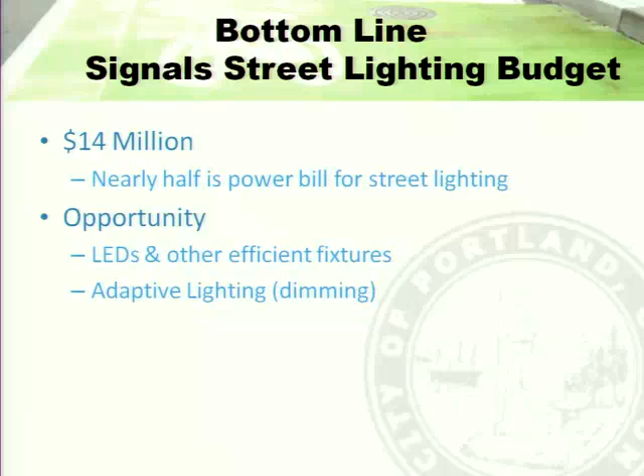Right now you turn on the street light and it's the same brightness from day one. We use the same power, and the reality is we should be doing better than that, right? At 3 in the morning, does it need to be as bright as it is at 8 p.m.? That's something we're working towards, but we haven't done it yet - we haven't gone to the effort of installing dimmers like you have in your household. But back to transportation, my true passion is in signals.

This is a good example of where transportation hierarchy exists. The Climate Action Plan has this graphic, so I borrowed it from that - you've probably seen this in many different places if you've followed policy and planning. Pedestrians are at the top of the triangle, so we should prioritize pedestrians because everybody's a pedestrian at some point in their trip. Then bicycles - the most efficient form of transportation. Public transit next, then commercial vehicles, high occupancy vehicles, and finally single occupancy vehicles. This is an intersection in downtown Portland where I'd suggest we've gotten it right: pedestrians have sidewalks - not the widest, but they're sidewalks, and this one's actually pretty good - and for bicycles, we've put in a buffered bike lane.

You heard about that last week and how effective that has been. We could do better, but we at least have allocated the space. Public transit, light rail intersecting the street, that's not bad. It's not a subway system, but pretty good. Commercial vehicles, we have parking here. High occupancy vehicles, we'll throw that in with transit. And then finally, single occupancy vehicles, we have one lane for single occupancy vehicles.

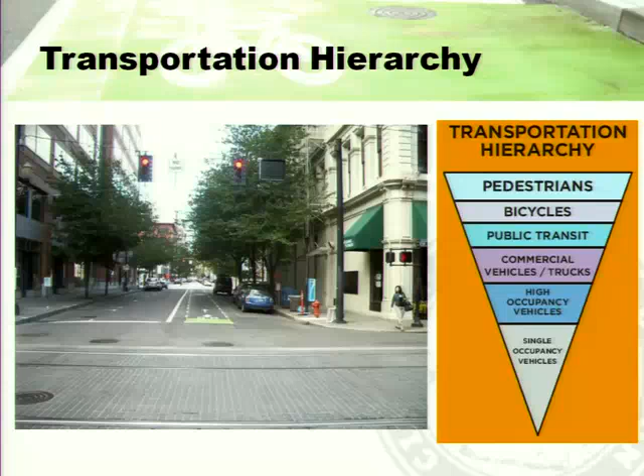So this picture is the embodiment of that pyramid. Now, have we done that everywhere? No, but is this a good example of where we're going to go? I think so, I'd suggest it is.

If you look ahead to 2030, huge increases in bikes. We want three times as many bikes, we want to halve the drivers, and we want to increase transit. So that's the direction we're going. How do we get there? How do the traffic signals, how do the intersections that we have change to meet those goals? Because those are laudable goals, those are huge changes, and we've got to think about that in terms of the overall urban context.

The Climate Action Plan was not very specific related to traffic signals. I don't know why, not everybody thinks about traffic signals like I do. But the closest goal was urban form and mobility, so that's where I put my eggs in that basket in transportation, thinking about creating vibrant 20-minute neighborhoods. How do we do that? Reducing VMT, improving efficiency of freight movement, and other non-transportation operations objectives. So all those various elements, I want to talk about this first one.

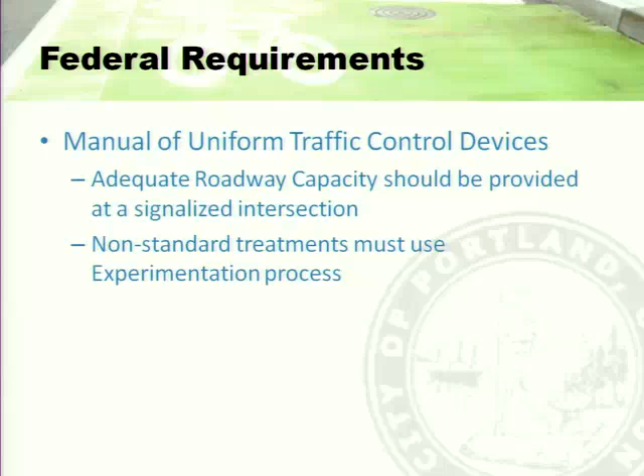So we have these obstacles though that are in our way, and federal requirements. The Manual of Uniform Traffic Control Devices is the document I refer to most as our favorite document. One of my favorite lines from that document is that adequate roadway capacity should be provided at a signalized intersection. What does that mean? Well, it means we should never have failure, right? And if you read the Highway Capacity Manual as well, it's focusing on the needs of automobiles as opposed to all users. Non-standard treatments not in the Manual of Uniform Traffic Control require you to go through this experimentation process where it's closely scrutinized. And that's really a question of how easy is it to innovate? How easy can we just go and look to try new solutions?

My case in point is the city and FHWA. We have pedestrian crossing signals, we have had half signals for a long time. We look at the Guide for Design of Ped Bike Facilities, that's one document we can go to look at what we should be doing. And then there's also, of course, the manual itself. So thinking about how we focus on improving crossing opportunities for pedestrians is very important to us if we're trying to create that 20-minute neighborhood, so that people can walk to go get a gallon of milk as opposed to burning a gallon of fuel to go get a gallon of milk.

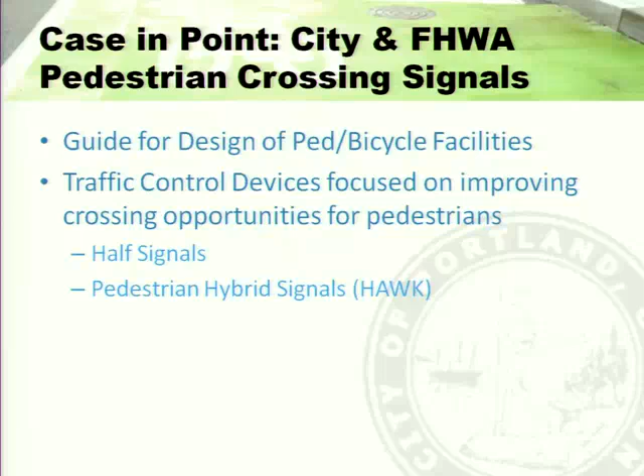And the half signals and the pedestrian hybrid signals, those are two examples that I'll talk to and what we have out there. Here's one of my heroes, Ray LaHood.

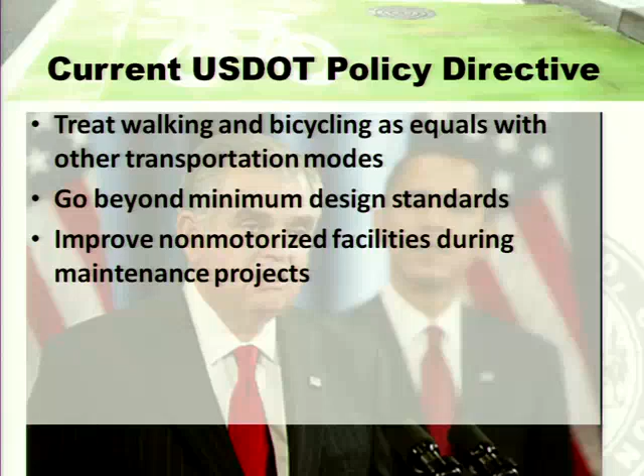Great policy directives come down, but the challenge is those policy directives—here's what he said: treat walking and bicycling as equals with other transportation modes, go beyond minimum design standards, and improve non-motorized facilities during maintenance projects. Those three things are right from Ray LaHood, but the challenge is they're not in the manual. The policies lead the documentation, and that's further exacerbated by views of the staff and the history and our experience.

But what is a half signal? FHWA has determined it's unsafe. If you're a motorist on that side street, you don't have any indication of what the main street is doing. So these have been outlawed for 30 years and they should be removed. But we want to create that 20-minute neighborhood—we want people to cross the street. So removing it, obviously there's an expense, but is it going to be safer is the question.

So we've wondered, what is that research based on? Why remove the intersection that's there today? And how does the federal government provide us with flexibility to meet those local policies? What are the safety benefits for future mode split targets? All those questions come from that top-down approach of 'you need to remove it because it's unsafe.' Well, that hasn't been our experience. So how do we relate our experience to that federal policy and think about the cost benefits of doing something like that?

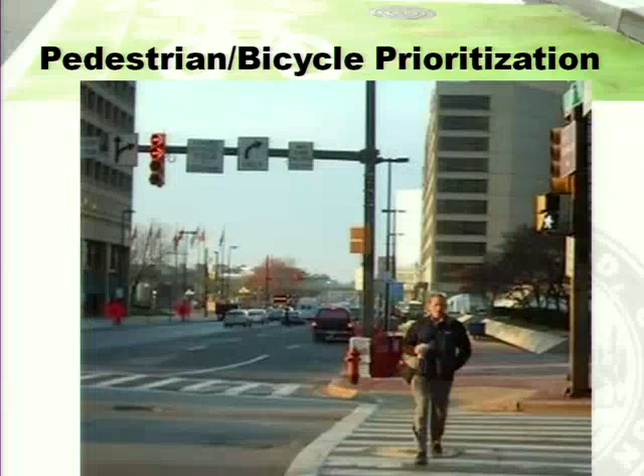And then pedestrian bicycle prioritization. Here's an example—this is actually downtown Baltimore, sorry, it's an older picture—where we've restricted this right turn and we have this walk indication up, giving pedestrians an opportunity. If you've ever walked in Baltimore, Eric probably can speak to this, you may not have the same experience you have in downtown Portland.

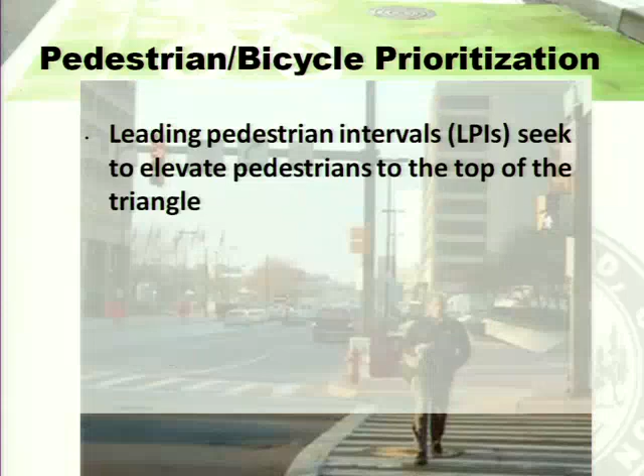So we want to do lead pedestrian intervals to elevate the pedestrian and give them a safer crossing. But there's a lot of research questions in this. Where do we apply these? And what are the safety benefits? These are documentation elements that we've applied.

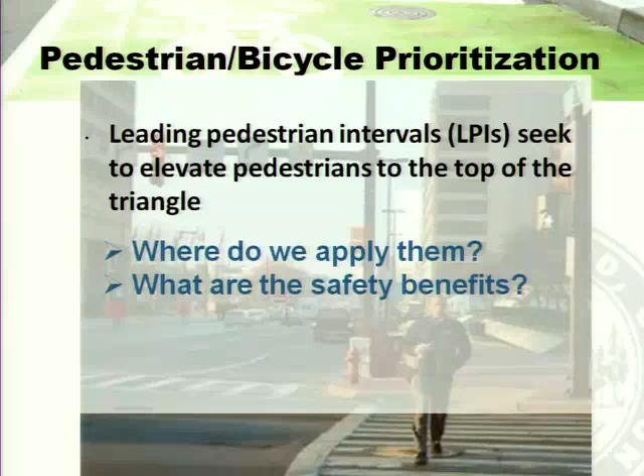We have 10 in Portland, but we haven't gone back and looked at what those elements are. So we have the idea, we've applied it. Now the missing link is where you all come in. Portland State, we need the research to support where do we do these in the future. Do we do them everywhere? Does that meet the goals and the policies that have been set forth? And again, what are the benefits of doing so?

Another one, passive pedestrian detection. This is in a very early stage, and again one of those things I inherited as I came into the role. The thinking is, well, vehicles aren't forced to push a button, why should pedestrians be? So if you think about the pedestrian at the intersection, we can detect them just like we detect cars, if we have a sensor that's looking down at the pedestrian. So a new innovative thing to do is maybe extend the green. If you have a pedestrian walking a little bit slower, perhaps extend the green so you don't bring up a conflicting movement that could cause a pedestrian crash.

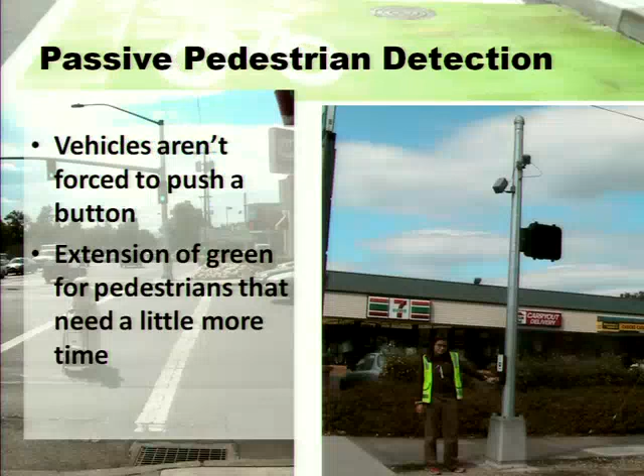And obviously you've probably seen the statistics from last year on pedestrian fatalities. We have a lot of room for improvement throughout the state, so we're doing some of that work now. And again, early on in the stages, the question becomes where do we apply these and what's the safety benefit?

Okay, downtown signal timing is something everybody in the room has experienced, and a fun little documentation piece. There's an adage in planning: are one-way streets inherently good or bad? How many think good? How many think bad? Oh, I think good. It depends, right?

It depends, it's not that easy. The answer, I think, downtown Portland's a good example of this—they're good, they can be really good. What we've done in downtown Portland is we have a one-way regular grid street system with signal cycle lengths that are very short. And why is that good? Well, it means that the pedestrian indications are always coming up.

And then we have this element of quarter cycle offsets where you progress down, but at a speed that's comfortable for vehicles and bikes, as long as the vehicles figure it out. So 12 to 16 miles an hour is our progression speed in downtown Portland, and we have a reverse progression of about 4 miles an hour for pedestrians.

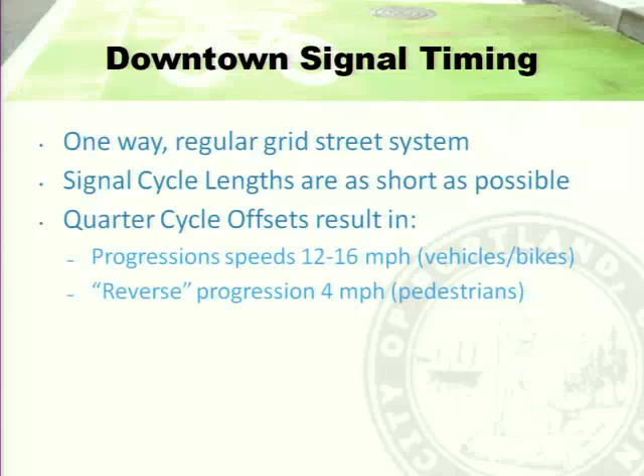So how do we do that? Well, we set it up so one direction of travel—here's your vehicle, it's one way. You can walk both ways, but vehicle travel is one-way going up the screen. So you leave here, you get there. If you travel at 13 miles an hour in the PM peak hour, you're golden, you will never stop. I freak my wife out when I'm driving downtown Portland—she's like, 'you have to stop, you have to stop,' and I was like, 'no, I don't, I know the speed.'

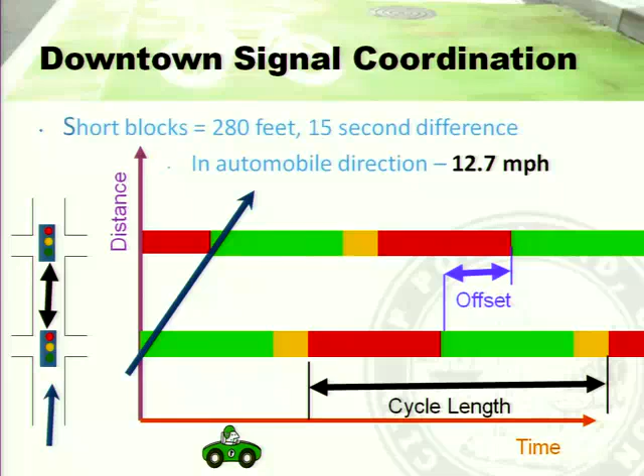So there's a little trick for you: 12.7 miles an hour is the number one way to go in downtown Portland. The trade-off of that—if you think about it, what we're trying to do downtown is create a safe pedestrian environment, and the safest pedestrian environment is the slowest vehicle environment.

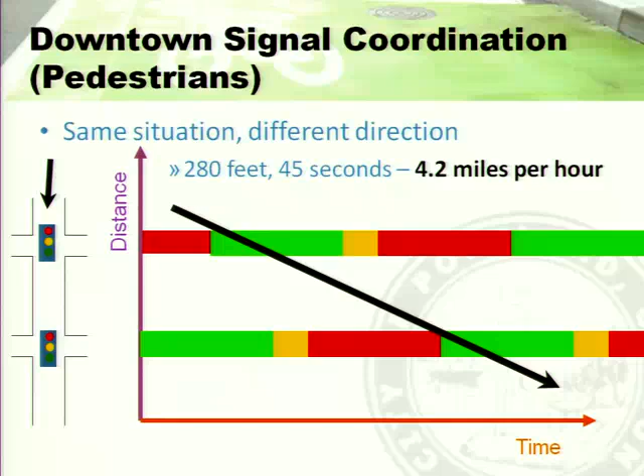So part of that then is walking opposite of the traffic signal progression. The traffic signal progression on the one-way street is going up the screen, so as a pedestrian you can walk against the flow of traffic on the sidewalk, please—not in the lanes of travel, we're not there yet. But the pedestrian progression speed is actually 4.2 miles an hour, so if you go slow and stroll you're not going to make all the signals, but if you pick it up a little bit you'll be great. So if you take away one lesson from today, this is it: walk against the flow of traffic.

Okay, what else are we doing? Innovations in ped-bike control—this includes the cycle track and the launch pad for making that left turn, but we can go beyond that. We can think about European practices; having been to Europe a couple times, we've had the opportunity to look at how they can provide better information. What do we do? We count down pedestrians to help them get out of the intersection, which encourages them to run across. Well, in Germany, they do the opposite.

They tell you how long it's going to be until we give you green. So 'grün in' is green in. It's a countdown that tells you when it's going to be okay to walk.

So what does that do? Well, it encourages people to wait. Hopefully it's actually a tattletale if you think about it. If the engineers have made you wait for 80 seconds, maybe it's time to change the signal timing, right? Maybe that means they're wrong, as opposed to you've been fooled into waiting for a time when it's safe to cross. So think about that in terms of flipping things, and that's one of the elements that in the U.S. I think we've thought in this school of thought for so long.

We have to think about if we're going to get to those mode split targets, we have to think more broadly and think about what the Europeans have done to get to where they are today.

The bike box, another good example of what we're doing. We borrowed that from European practice. It's commonplace, increases visibility for cyclists in intersections, and increases efficiency for heavily trafficked locations. If you can get 10 cyclists in this bike box, that's going to improve the efficiency, right? So if we get to that 30% mode split target, we're going to need that sort of room to provide the movement of bicycles, as opposed to just that one car sitting there 15 feet back.

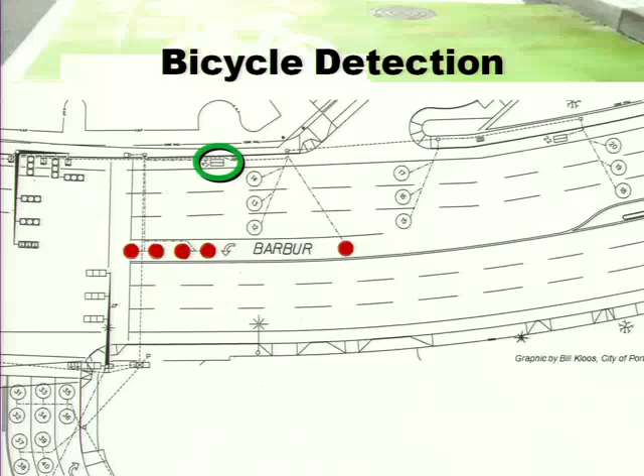And then lastly, bike detection. Again, it's one of those things where this is our common detection for vehicles — we put in loop detectors and detect metal that comes across the intersection. This is Southwest Barbur and Hamilton here on the side street. We put in all this bike detection, and this is a new intersection where we actually put in a detector here for bikes. We put in advanced detectors for cars, but then we also put in an advanced detector for bikes.

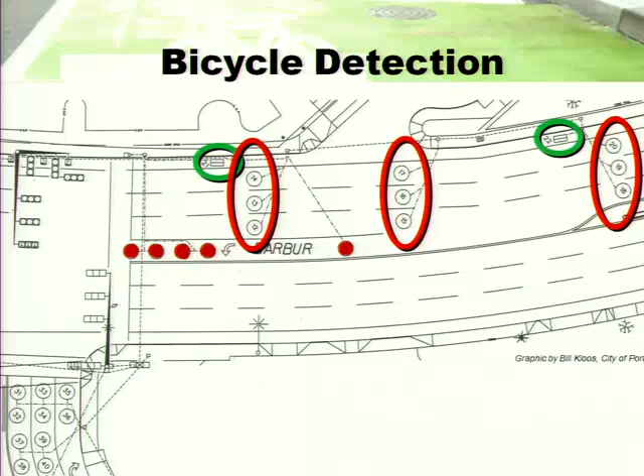But this is not the norm. Of our 1,070 intersections, only about 50 have treated bikes similarly to how we've treated cars. So in a lot of cases with bike detection, we are not treating them as equals — we're asking them to push the button as opposed to just being detected like a regular vehicle would. A regular vehicle — see, my terminology is even poor — like a motorized vehicle would.

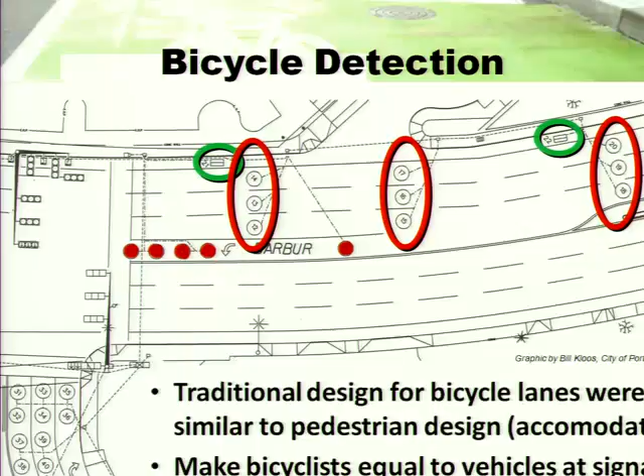And this is our most recent example. Here's a classic case where we did our level best to design the intersection, but this is not a standard intersection for us. This is a case where we had two right turn lanes here at Broadway and Williams crossing the bike lane. So here we have the bike lane, but it's going forward, going through.

In the right turn lanes, you have the dual threat phenomenon that could cause us problems. So what do we do? We had through green arrows — that's definitely in our toolbox today. In this case, we added the bike signal sign, a part-time restriction sign, and then we put the bike signal on recall. We also, to enhance this a little bit more, made this signal yellow so it stands out just a bit more. We put in an overhead sensor, like I showed with the other detection — we were trying that out. And then we were doing some future loops back upstream of the intersection that would predict when a bike is going to be here, so we give an advance message to this intersection to make sure we bring up the green indication here.

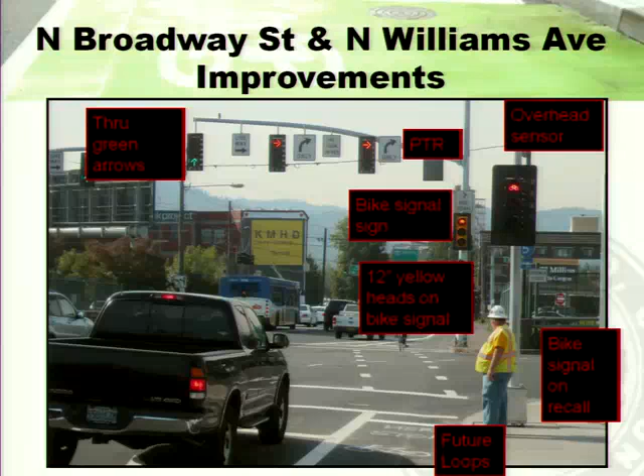Now, one of the things we still have to address: we have this standard — these are the signal heads. This is a bike signal head mounted at 17 feet 6 inches. Is that the right appropriate scale for bikes standing right here? Probably not, but that's our current design standard for these sorts of things. But at least we got this display, and I would argue with anyone that this is as clear as we could possibly make it.

And our problem with this intersection moving forward is only enforcement. So we're actually exploring whether we need to do a red light running camera as well, in addition to all these other things.

So all these various elements pulled together really form a foundation for research and experience. But a lot of these examples are coming from Europe, and we're using that as a way to transform our signals from where they are today to where we want to get.